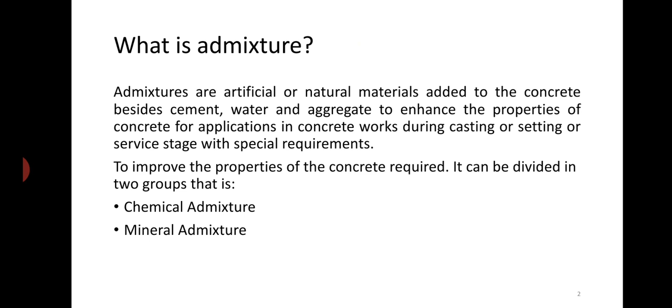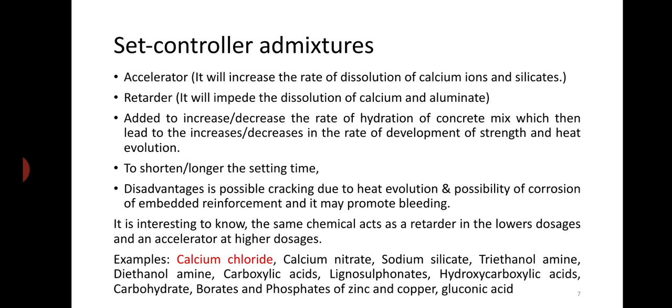In my previous lecture, I have covered the chemical admixtures part. Now we will proceed on mineral admixtures. In the last audio lecture, we have covered what is admixtures, the function of admixtures, types of chemical admixtures, and these details. Now the turn is for mineral admixtures.

The mineral admixtures optimize the particle size distribution of the cementitious material that leads to homogeneous concrete. Basic meaning is that it's a very fine size. As we all know, what are the mineral admixtures? These are fly ash, silica fume, rice husk, ground granulated blast furnace slag, pozzolanic, cementitious, calcined clay, metakaolin.

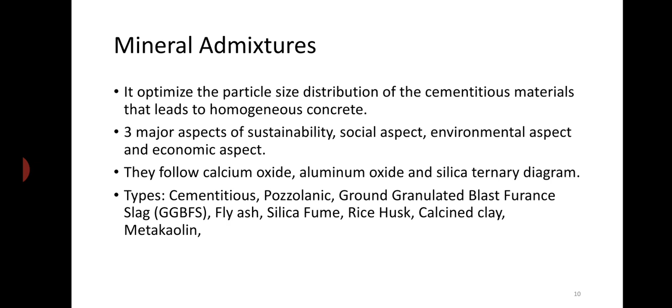In the further video we learn which type of properties it increases. Basically, we have considered three main aspects: social, environmental, and economic aspect for choosing the mineral admixtures. The basic components of mineral admixtures are calcium oxide, aluminum oxide, and silica.

Now, the properties of fly ash. The fine particulate waste material produced by pulverized coal based thermal power stations is an environmental pollutant. It has a potential to be a resource material. As per IS 3812 2003, the generic name of the waste product due to burning of coal or lignite in the boiler of a thermal power plant is pulverized fuel ash. Pulverized fuel ash can be fly ash, bottom ash, pond ash, or mound ash as per the process.

Fly ash is the pulverized fuel ash extracted from the flue gases by any suitable process like cyclone separation or electrostatic precipitation. Fly ash, also known as a pozzolan in PCC applications, is a siliceous and aluminous material which in a finely divided form and in the presence of water reacts with calcium hydroxide at ordinary temperature to produce cementitious compounds.

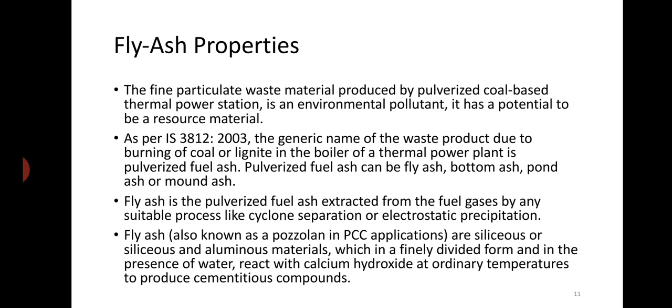These are the environmental benefits of using fly ash. As we use fly ash in the concrete, it has significant environmental benefits like increasing the life of concrete roads and structures by improving concrete durability. How does the durability improve? Because it improves the particle size distribution curve, so we get homogeneous concrete, and the pores in the concrete reduce, porosity reduces, that's why the durability increases.

Net reduction in energy use and greenhouse gas and other adverse air emissions when fly ash is used to replace or displace manufactured cement, because production of cement uses 372 kilojoule per kg energy, but producing fly ash uses net zero energy. So fly ash does not require any special energy, but for production of cement 372 kilojoule per kg energy is required. Reduction in amount of coal combustion products that must be disposed in landfills, and also conservation of other natural resources and materials.

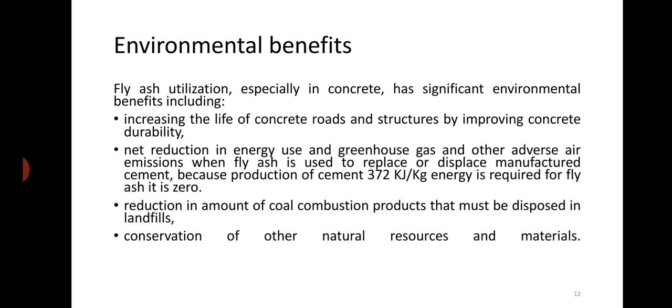Benefits to concrete. In the fresh concrete, it improves the workability, decreases the water demand, and reduces heat of hydration. Why does it reduce the heat of hydration? Because we replaced the cement by using fly ash. If we use 10% fly ash, then we use 90% cement compared to control concrete. So it reduces the heat of hydration, decreases the water demand and improves workability in the fresh concrete.

For the hardened concrete, it increases the ultimate strength, because it gives later strength to concrete, reduces permeability, improves durability, and improves resistance to corrosion, because it reduces the porosity. The porosity is reduced, so the permeability is also reduced. Permeability is reduced, so the durability of the concrete is improved, because other chemicals do not enter into the concrete and destroy it, so the durability of the concrete increases.

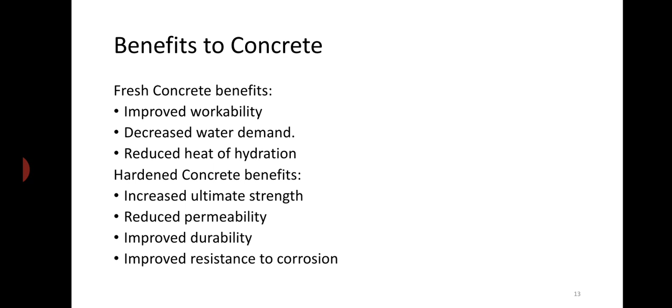These are the specifications for fly ash in cement and concrete in this chart as per the ASTM, European specification and IS 3812-2003. As per these codes, it is specified what is the component of SiO2 minimum. These are specified reactive soluble SiO2 minimum, and Al2O3, MgO, LOI, total alkalis, SO3; all these charts are given in this slide. These are all the data.

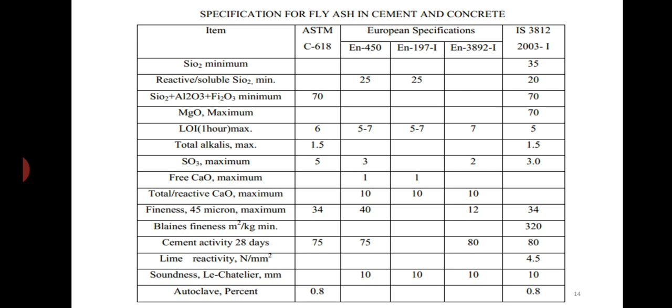Now the GGBFS, ground granulated blast furnace slag in concrete and its advantages. What is ground granulated blast furnace slag? It is a byproduct of iron manufacturing which, when added to concrete, improves its properties such as workability, strength and durability.

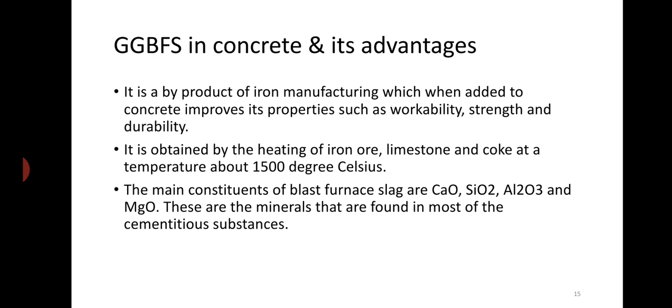In the presence of water, it shows cementitious properties alone. It is obtained by the heating of iron ore, limestone and coke at a temperature of about 1500 degrees Celsius. The main constituents of blast furnace slag are CaO, SiO2, Al2O3 and MgO. Basic three components are there always. These are the minerals that are found in most of the cementitious substances.

What is the formation of ground granulated blast furnace slag? The formation of GGBFS is not direct. It is the byproduct of iron manufacturing as a molten slag and the molten iron.

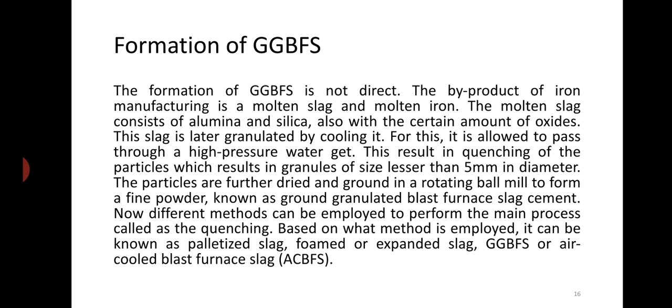The advantages of GGBFS in concrete. GGBFS in concrete increases the strength and durability of the concrete structure as compared to the control concrete. Sometimes, from the strength point of view, it gives later strength to the concrete as specified by the journals. It reduces voids in concrete, hence reducing the permeability. GGBS gives a workable mix. It possesses good pumpability and compaction characteristics.

The structure made of GGBFS constituent helps in increasing sulfate attack resistance. The penetration of chloride can be decreased. The heat of hydration is less compared to conventional mix hydration. The alkali silica reaction is resisted highly. These make the concrete more chemically stable, give a good surface finish and improve aesthetics. The color is more even and light compared to the controlled concrete.

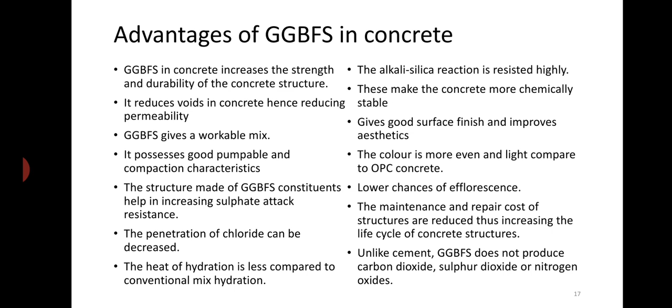Basically, lower chances of efflorescence; the maintenance and repair cost of the structure are reduced, thus increasing the life cycle of the concrete structure. Unlike cement, GGBFS does not produce carbon dioxide, sulfur dioxide, or nitrogen oxides. These are the basic advantages of GGBFS. These are the basic properties it gives when GGBFS is present in the concrete.

The bleeding characteristics of fresh concrete with GGBFS. A higher replacement with GGBFS leads to an increase in the bleeding.

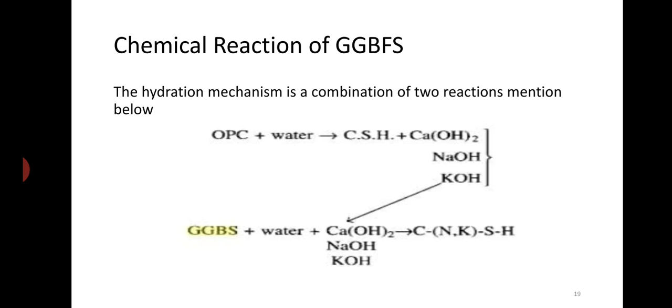The rate of reaction undergone in a concrete mix with GGBFS mainly depends upon the following factors. जैसा हमने ऊपर भी देखा, basic है temperature. With increase in temperature the reaction rate increases and vice versa. The quantity of the components: the increase in the cement component proportion will increase the reaction, because

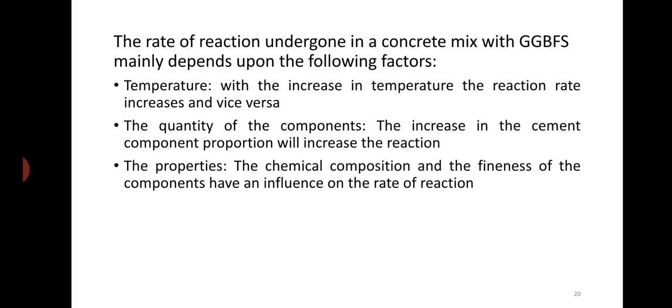Now GGBFS is completed. We have to switch over. Our topic is highly reactive metakaolin concrete. It is produced from high purity kaolin clay by calcination at temperature ranging from 700 to 800 degrees centigrade. Highly reactive metakaolin concrete. It basically affects the strength development of concrete, drying shrinkage of concrete, and durability of hardened concrete.

Strength development of concrete: it achieves greater strength than the control concrete because it is highly reactive. As the name shows, it's highly reactive metakaolin. It increased the strength development of the concrete, and it lowered the drying shrinkage problem in the concrete. When we use highly reactive metakaolin in the control concrete, it reduces the drying shrinkage.

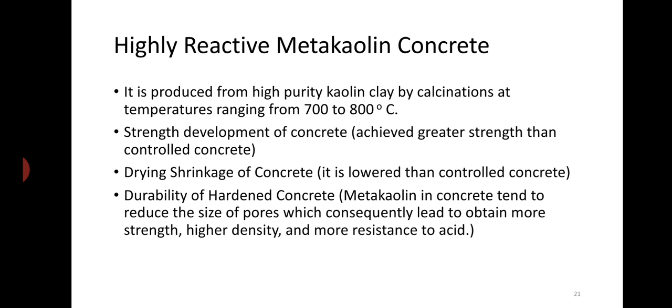As per the journals or previous studies, durability of hardened concrete: metakaolin in concrete tends to reduce the size of pores, which consequently leads to more strength, higher density, and more resistance to acid attacks. Application of concrete containing metakaolin: it improves the strength of lightweight concrete, decreases permeability, and allows releasing post tensioning earlier.

Develop flexural strength early, increase both reflectability and durability factor, increase the strength and tackle alkali silica reaction, enhance chloride

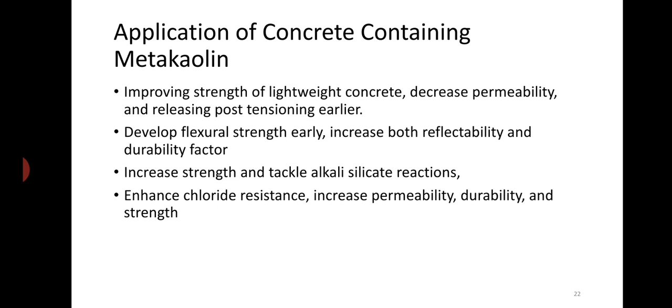Durability. Now we switch the topic to microsilica in concrete. What is microsilica? Microsilica, also known as silica fume or condensed silica fume, is a mineral admixture composed of very fine solid glassy spheres of silicon dioxide. It is usually found as a byproduct in the industrial manufacture of ferrosilicon and metallic silicon in high temperature electric arc furnaces. Microsilica reduces the rate of carbonation and decreases permeability to chloride.

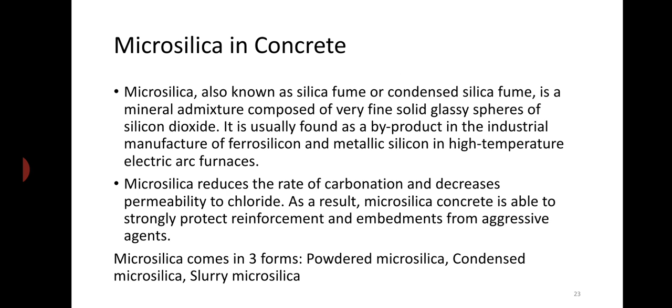As a result, microsilica concrete is able to strongly protect reinforcement and embedment from aggressive agents. It is available in three forms: powder microsilica, condensed microsilica, and slurry microsilica. Effect of microsilica on concrete. Effect on fresh concrete: it reduces segregation possibility, so it can be used as a pumping aid. It almost eliminates bleeding, consequently finishing work can begin early. Workability and consistency of concrete decreases.

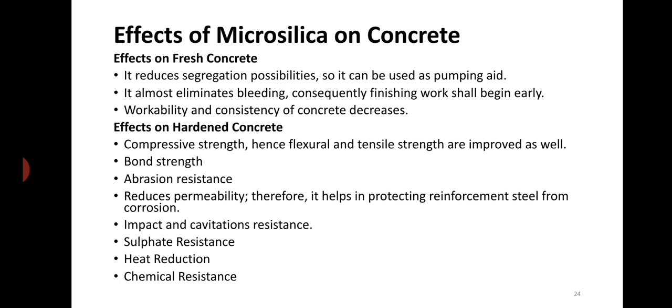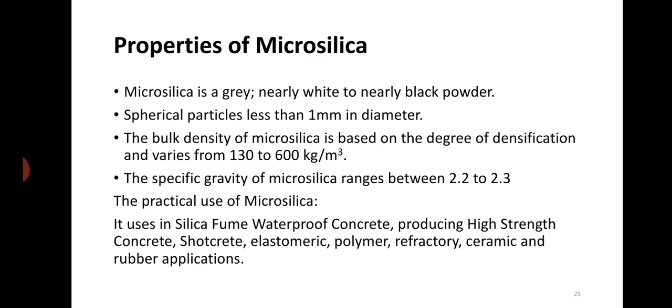Now the advantages of microsilica. It reduces the thermal cracking caused by the heat of cement hydration, improves durability to attack by sulfate and acid waters, and reduces the early age temperature rise. Silica fume is cheap, therefore it is cost effective. It reduces the overall slab weight and cost. Addition of microsilica decreases efflorescence due to the refined pore structure and increased consumption of calcium hydroxide.